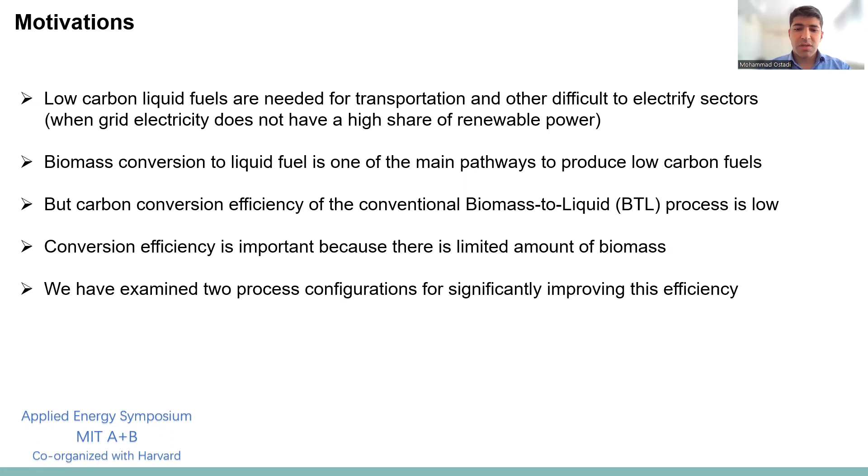To give you motivations for this work, low carbon liquid fuels are needed for transportation and other difficult to electrify sectors, especially when grid electricity does not have a high share of renewable power. Biomass conversion to liquid fuel is one of the main pathways to produce low carbon fuels, but the carbon conversion efficiency of the conventional BTL process or biomass to liquid process is low. Carbon conversion efficiency is important because there is limited amount of biomass. In this work, we have examined two process configurations for significantly improving this efficiency.

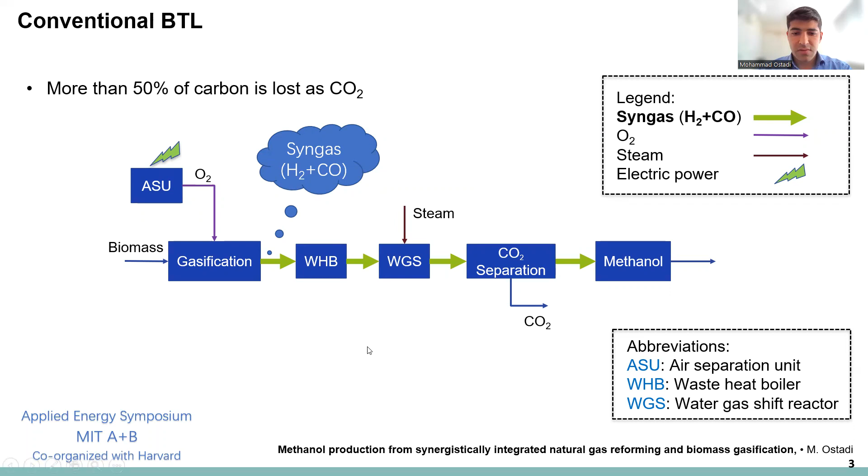When we look at the conventional biomass to liquid process or BTL process, we see that biomass is gasified in a gasifier, where here we have chosen an entrained flow gasifier where oxygen is needed, and that is provided by an air separation unit. Syngas is a mixture of hydrogen and CO, but the hydrogen content in the syngas is low, and what is conventionally done is to increase that in a water gas shift reactor, where part of CO is converted to CO2 and hydrogen. But the downside is that we need to separate the CO2, and that is the reason for low carbon efficiency in this process. More than 50% of carbon is lost as CO2.

So to continue with the motivations, we want to provide optimal utilization of both carbon and hydrogen in biomass. Conventional BTL processes have low carbon efficiency because the syngas is deficient in hydrogen. Natural gas, on the other hand, is rich in hydrogen. And through synergistic integration of syngas generated from biomass and natural gas, we can produce the right composition for methanol synthesis without much loss of carbon as CO2. Methanol production is the liquid of focus here. It is an important chemical feedstock and a high octane fuel. And compared to Fischer-Tropsch process, which is used for producing jet fuel, diesel, etc., a methanol process is simpler in production and purification.

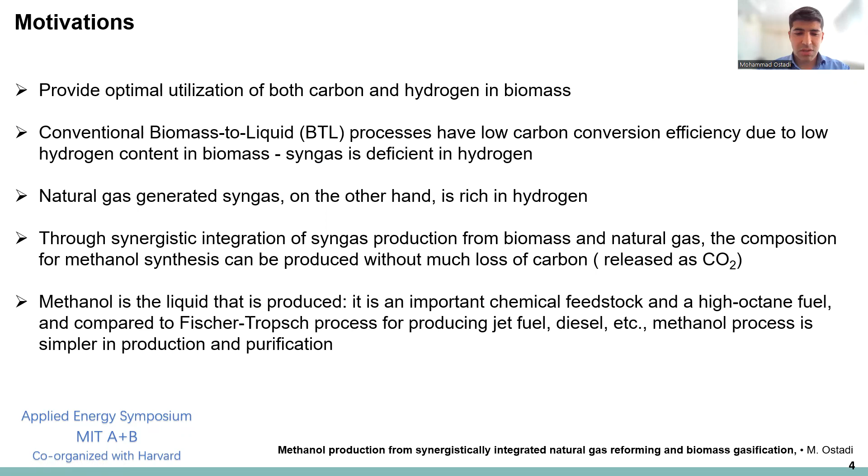Here we have not considered the co-feeding of natural gas and biomass in the gasifier for several reasons. One of them is that the hydrogen to CO ratio of the produced syngas would not be high enough for methanol synthesis. That is because the hydrogen would react preferentially faster with oxygen than other fuels in the gasifier. Moreover, the gas cleaning would be more difficult because of increased flow rates. And another reason is that methanol production would be coupled to both natural gas and biomass.

So the approach we used is the parallel reforming and gasification, where we have increased the feed flexibility because gasifier and reforming process are fully decoupled, and natural gas is used as swing fuel. Therefore, we can have the right hydrogen to CO ratio for methanol production without much loss of carbon. And our aim is to have more than 50% of carbon entering the plant to be from biomass, but we can have 100% carbon from natural gas as well.

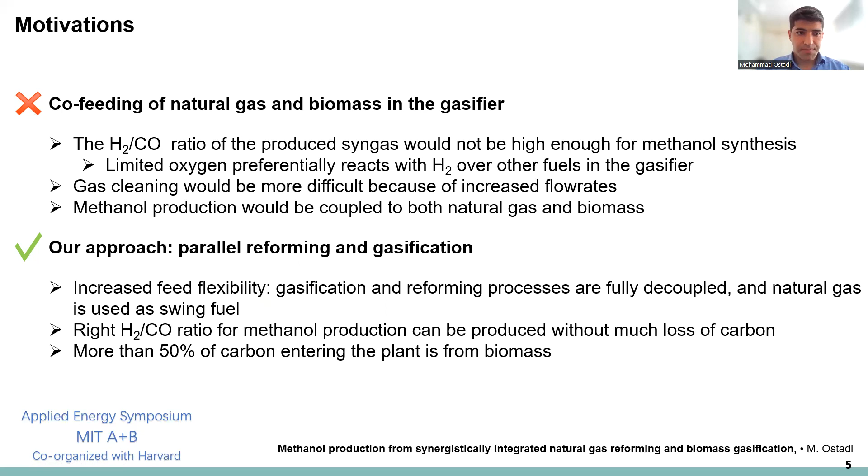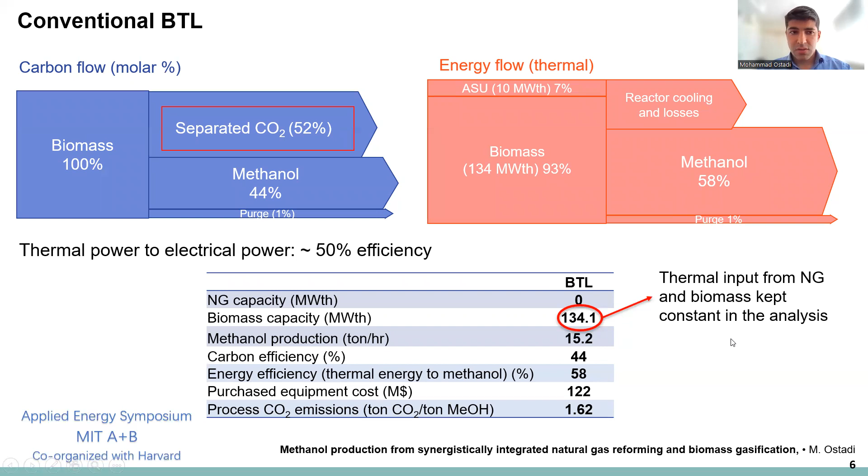So some of the results from the conventional BTL that I showed before, and this is the base case for our comparison. As you can see, more than 50% of carbon leaves as CO2, and the carbon efficiency would be 44%. I've also shown the energy flow in thermal units, and for that we have assumed a thermal power to electrical power of 50% efficiency to convert electrical power to thermal power, and that would result in 58% energy efficiency. We have considered the 134.1 thermal input from natural gas and biomass to be constant in this analysis, and also in the next designs that I'm going to show you.

So the first proposed design is utilizing autothermal reformer, or ATR, and solid-oxide electrolysis cell to provide the hydrogen and oxygen. As you can see, the natural gas reforming and gasifier units are in parallel and decoupled. The SOEC is producing the hydrogen and oxygen needed for the plant. So we produce just enough hydrogen and oxygen for this process. Therefore, it does not need a separate air separation unit. We do not also have a separate acid gas CO2 removal unit. And the acid gas removal here is mainly to remove hydrogen sulfide from the biomass.

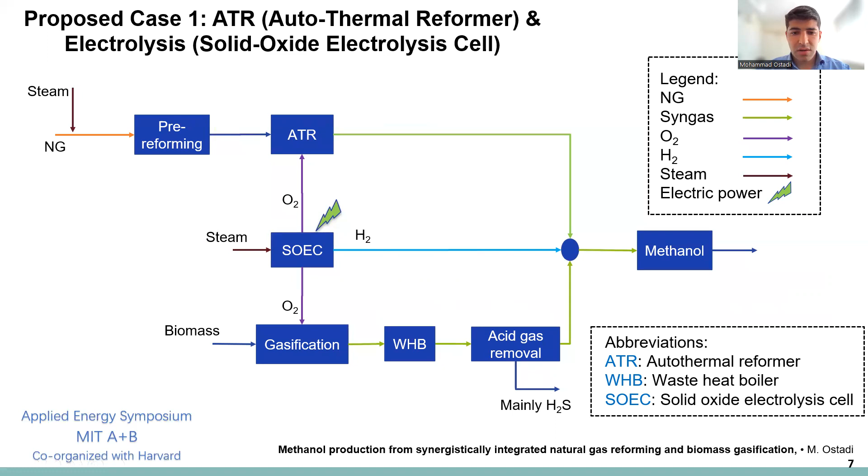Therefore, we have high carbon conversion efficiency, and here are the results for this case. As I mentioned, we aim to have more than 50% of carbon from biomass, as it is shown here. This would give us about 90% carbon conversion efficiency, and on the thermal energy flow, we can see about 55% thermal energy to methanol. And as I mentioned, we have kept the total thermal input from natural gas and biomass at 134.1. And this is the ratio we would get to have more than 50% of carbon from biomass.

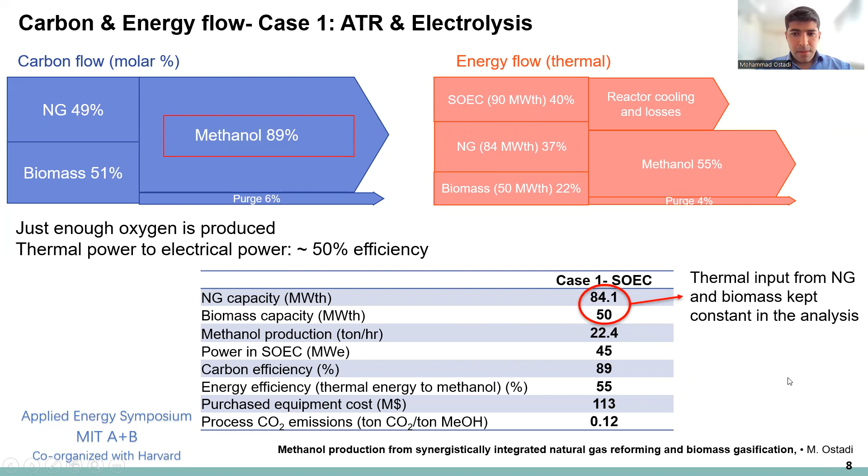The second design that we proposed here is using ATR, autothermal reformer, and gas heated reformer, or GHR. So what is ATR gas heated reformer? Gas heated reformer is similar to a steam methane reformer, where catalysts are packed within tubes, and the heat is provided on the shell side. But the difference is that we are not using a furnace to provide heat. We are using the ATR outlet exhaust stream, which is at high temperature here, 1050 degrees C, to provide the heat for steam methane reforming. Therefore, we have the advantages of steam methane reforming, but we are not producing CO2.

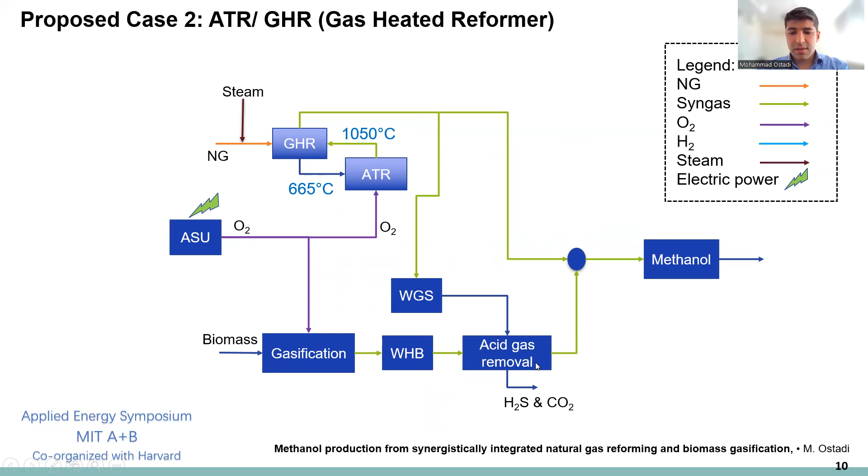Here, we also have an air separation unit to provide oxygen. The syngas generated from natural gas is rich in hydrogen, but it's not high enough when combined with biomass syngas to have the right composition. Therefore, we need to separate part of its CO2. We can increase the hydrogen content by a water gas shift reactor, so part of CO is shifted towards CO2 and hydrogen. One of the synergies that we can utilize between reforming and gasification is that they can share the same CO2 removal unit. So we are not going to build a new CO2 separation unit. They can share the same unit and separate part of the CO2.

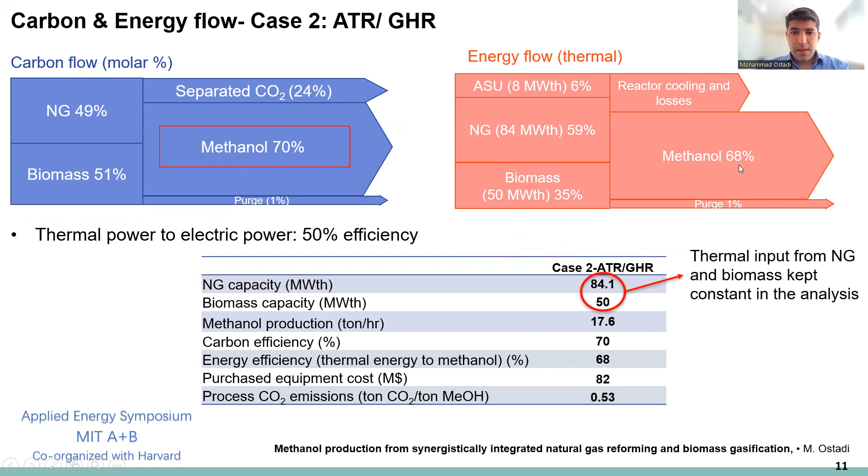Here are the results for this case. We can see the carbon conversion efficiency is 70% in this case. Again, the total thermal input from natural gas and biomass are kept constant at 134.1 megawatt thermal. And the energy efficiency is 68%. We have also looked at the composite curves to see if we have enough heat within the process. Again, this process also has enough heat, and we do not need any external heating. We also have low temperature excess heat available, which is 34 megawatt, which can be utilized.

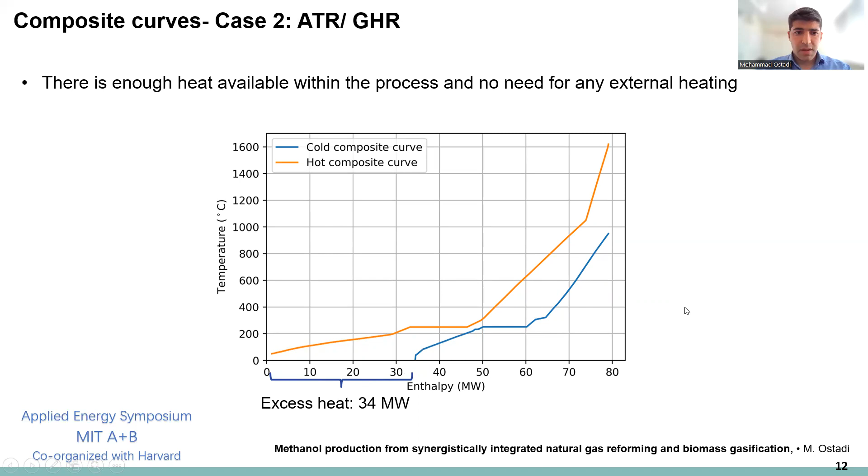This is the summary of the cases I've shown, where we have the conventional BTL on the right side, and the two new designs shown here. The carbon conversion efficiency is increased by 1.6 times in case 2 and 2 times in case 1 compared to the BTL process. The process CO2 emissions are decreased by 3 times and 13 times compared to a conventional BTL process. So both designs have lower process emissions than the conventional BTL process.

Case 1 has the highest carbon conversion efficiency, but it is more expensive than case 2, as you can see here. But we also have a higher methanol production, so the specific cost increase is only 8%. Case 1 is heavily dependent on renewable power, which is 45 megawatt to be used in electrolysis. And the BTL is the least favorite because it's most expensive with highest process emissions.

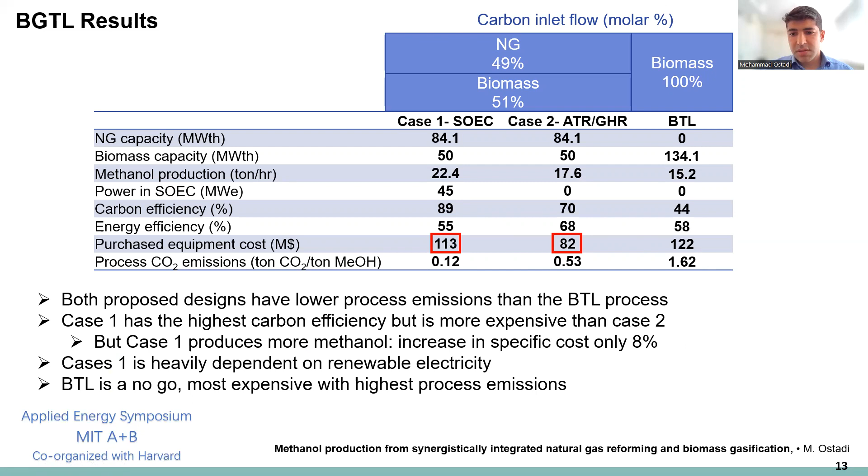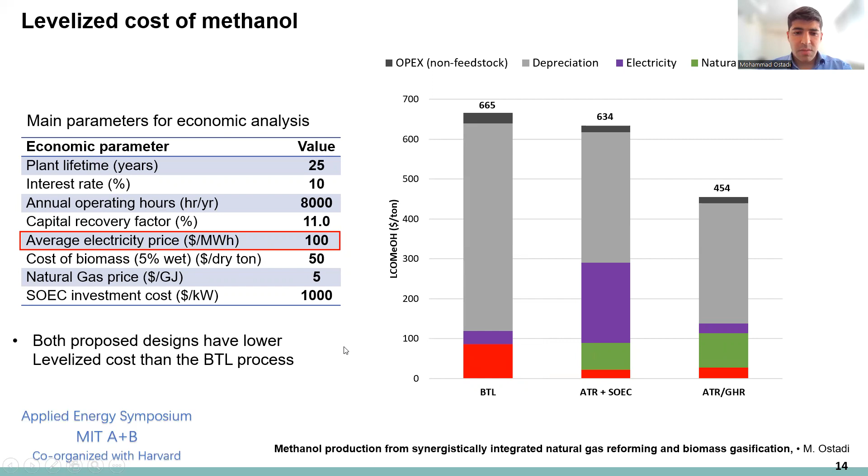We have also done a levelized cost analysis of the process, where we have the two new designs on the right side and the conventional BTL on the left side. And we can see both proposed designs have lower levelized costs than a conventional BTL process. Here we have utilized an average electricity price of $100 per megawatt hour. But that's an important variable, so we have looked at it more closely, and we have changed the electricity price from $0 to $150 per megawatt hour. And we can see case 1 is heavily dependent on the electricity price. By considering an electricity price of $100 per megawatt hour, case 1 is 5% cheaper than the conventional BTL, and case 2 is 30% cheaper.

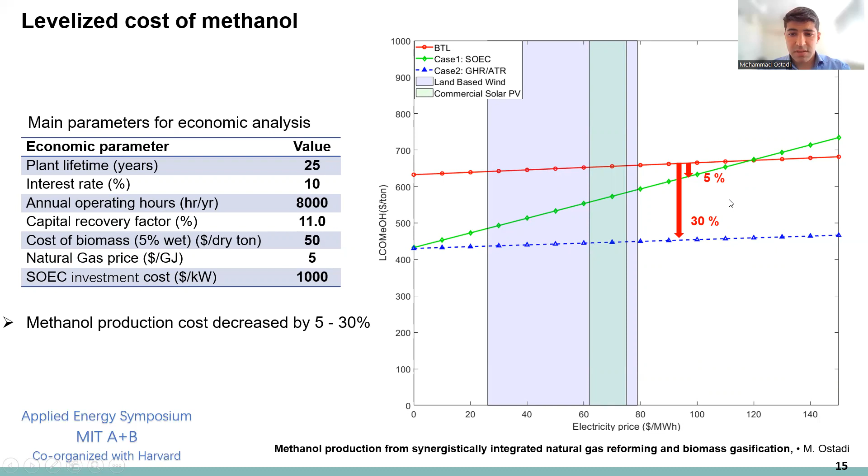A quick point about the feed flexibility. The proposed processes can operate flexibly on either one of biomass or natural gas and any combinations in between, and also natural gas acts as a swing fuel.

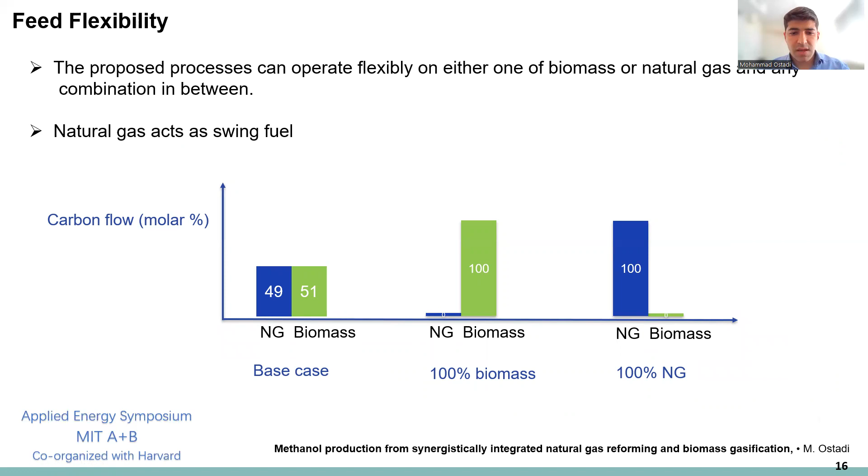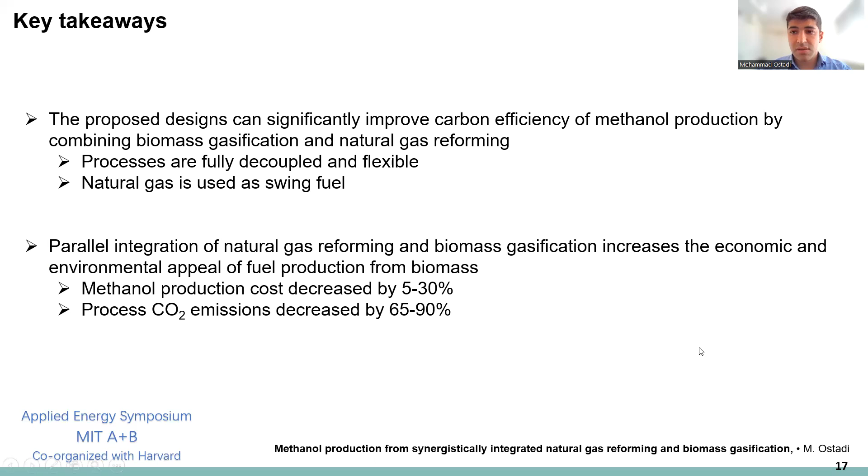A few key takeaways. Here we have proposed designs that can significantly improve carbon efficiency of methanol production by combining biomass gasification and natural gas reforming. These processes are fully decoupled and flexible, and natural gas is used as swing fuel. Through parallel integration of natural gas reforming and biomass gasification, we can increase the economic and environmental appeal of fuel production from biomass, mainly by reducing the methanol production cost by 5 to 30% and reducing process CO2 emissions by 65 to 90% compared to a conventional BTL process.